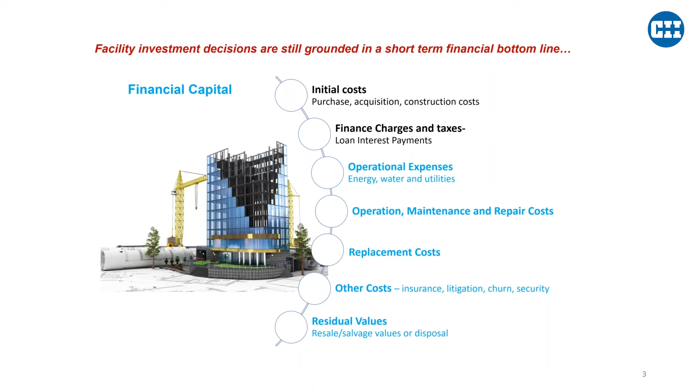In addition to that financial capital, we're also talking about natural capital and human capital as a part of this research study. These are equally important in assessing facility performance for organizational value. So life cycle costing standards have been developed for about 25 years. This NIST life cycle costing manual is from 1995 and definitely sets up a structure for life cycle costing of facilities. We have initial costs, energy costs, operation and maintenance, and so on.

The NIST manual also mentions non-monetary benefits and costs, but the implementation of that has been limited. So one of the goals of our research project was really how do we establish those non-monetary benefits and costs as meaningful components of facility decision-making and analysis. So traditional financial return has been estimated by return on investment, which is just an annual benefit and a first cost relationship, or years of payback, where we take the first cost investment and we divide it by annual benefits.

Another popular assessment tool for financial decision-making of facilities is net present value, or NPV, where we do include a life view. We take future values, future benefits, future costs related to the facility, and discount those back to present value terms. And costs can be investment, maintenance, or replacement costs. And benefits can include things like income, future income, or other benefits that happen over the course of the facility. So we're going to talk about incorporating those as well and use those as some comparison between our approach for the triple bottom line and what we see traditionally in the facilities area.

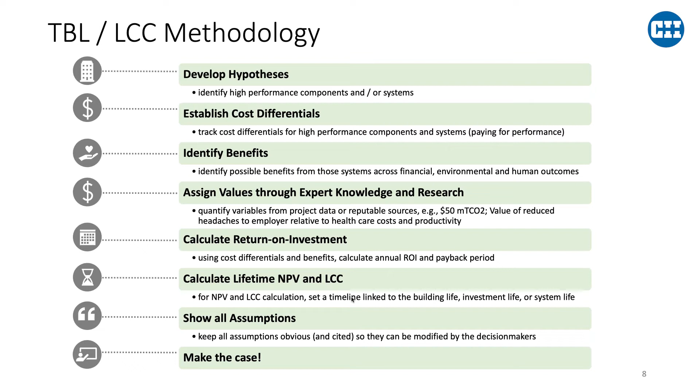One thing you should know is that all of our work is done where the assumptions are completely obvious and cited, so that if any one of you begins to use the calculations, you can change the assumptions to suit what you fundamentally know or believe relative to your facilities or region. And then we make the case through written case studies.

We were very privileged to begin to develop hypotheses with a number of the facilities committee members, University of Florida Shands Hospital System, Deloitte's EDGE project in Amsterdam, the Smithsonian Institution's National Museum of African American History and Culture, NASA's new headquarter project in Florida, and then we began work with the Department of State and with Kaiser to develop hypotheses of investments that were made in those projects that could in fact be cost justified through life cycle and triple bottom

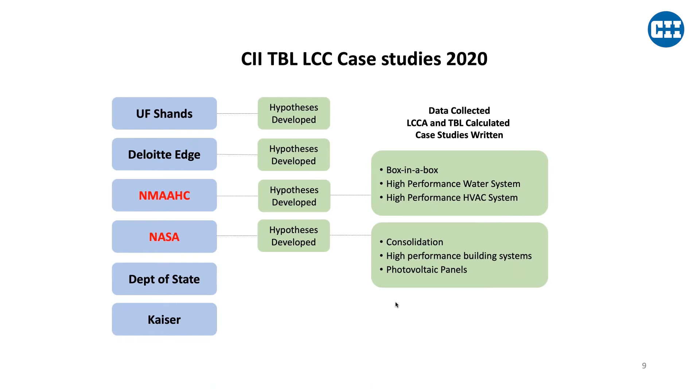line cost. Because of the pandemic, we focused our entire year on 2 of those case studies and developed 3 hypotheses for each of them and built the economic arguments for each of them. And I will take one of those and then pass the baton back to Robert.

Many of you may have had the privilege of visiting this museum before it was closed due to the pandemic in March. The National Museum of African American History and Culture is one of the Smithsonian museums on the Mall in Washington, D.C. What's important to note is that they invested very heavily in not just making a high-profile building, but a high-performance set of systems.

And the arguments were made for why this building needed to have a high-performance box in a box in a box. I'll give more description of that. Why it needed to have a cutting-edge water collection and reuse system, and why it needed a cutting-edge HVAC system with dedicated outside air, heat recovery, and chilled beam technology for the offices.

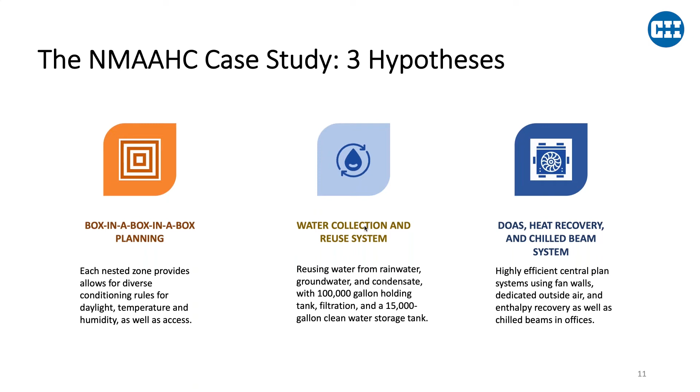So let me talk a little bit about the hypothesis that we made. The investments in NMAAHC, and that's a shorthand since it's a mouthful to say National Museum of African American History and Culture every time. The investments in NMAAHC's museums, 4 layered thermal conditioning zones, which can be called a box within a box within a box, led to significant triple bottom line benefits, advances to the profit, to the financial capital, to the planet or the natural capital, and to the people, the human capital.

The 4 nested zones are an airtight set of dry exhibit cases throughout the museum, so their most tight thermal conditioning is in exhibit cases, set inside of exhibit visitor zones, which are separated from the main circulation areas by automatic glass doors. So it's slightly looser, but still quite tight thermal conditioning zone.

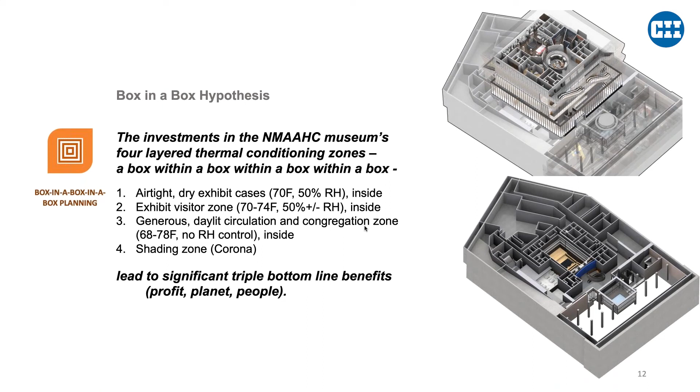And then a very generous daylit circulation and congregation zone with no relative humidity control and a much wider band of thermal conditions. And that was set inside of a shading zone called the corona. So let me work this the other way. The corona is an exhibit itself. It actually has retail value. People are buying artifacts that are reminiscent of the corona to take home after they visit the National Museum of African American History and Culture. It is actually a cultural object.

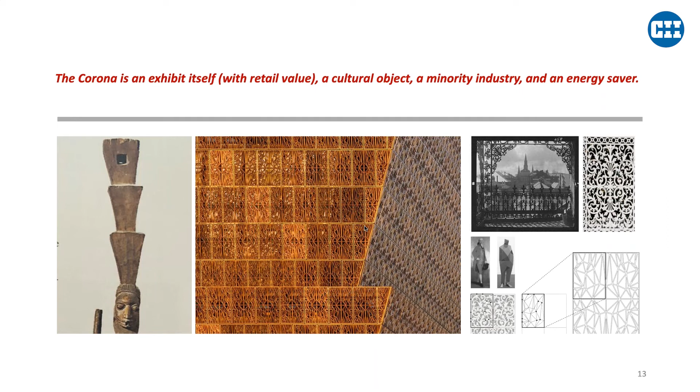The architectural team working on this project were trying to be evocative both of historic African art and cultural icons, and also evocative of an industry that was very African American centric in steel and iron work. It also turns out it's a real energy saver. The variations in the corona densities were optimized by orientation, by south, east, north, and west to manage heat gain and glare with different levels of density on the orientations that had most problematic solar heat gain.

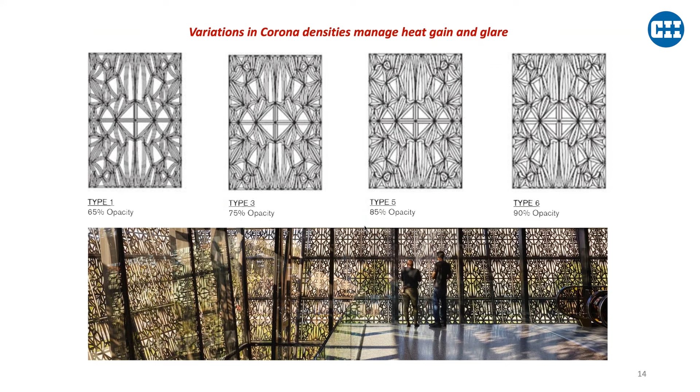The atrium, the next zone, is a public space that has significant cost premiums. In fact, if we just look at what you would need to circulate through the galleries, we estimated that there was almost a 7.72% increase in circulation area over what you would need. And at a cost of about $1,000 a square foot, which is what it costs to build museums of this caliber, it was a $31 million cost premium.

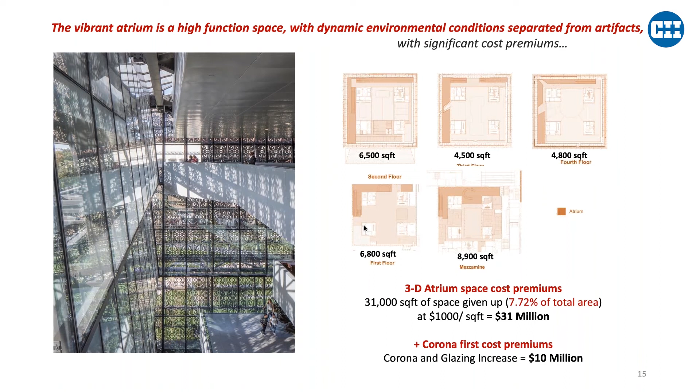In addition to that, the corona, which is a free-floating shading device outside of the high-performance facade, you could have left off that shading device and then upscaled the mechanical system to cope with the solar loads and the heat loss and heat gain loads and dealt with the glare issues. But the decision to invest in that corona was also a $10 million decision. So we actually have a first cost of $41 million, which we'll come back to, which we're going to try to cost justify.

In addition to that, the exhibits themselves were isolated mechanically by automatic doors. So when you enter any one of the exhibit zones, you walk through a glass door, similar to walking in and out of a grocery store, that helps to secure the environmental conditions that surround the artifacts. It also provides security in the event of major public events, and I'll come back to that. And then the glass cases actually have desiccant units built into them, and that provides the tightest humidity and temperature control for the artifact preservation.

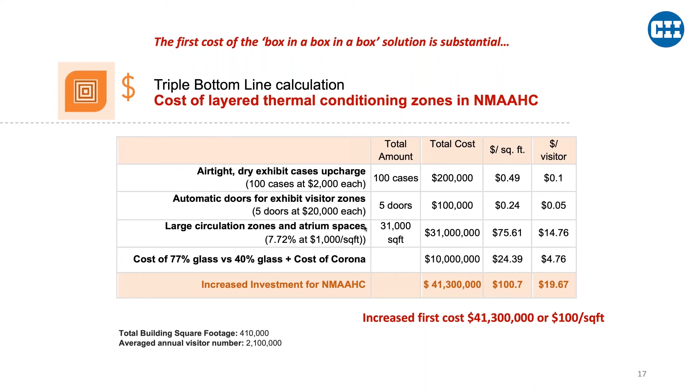Adding up all of those investments, those 4 layers of investments, we have a $41 million increase, or about $100 a square foot increase investment in creating the box in a box in a box. So what are the benefits? Well, the benefits of this box in a box, number one, we're seeing actually visitor numbers. Now, we'll come back to whether that's just because it's the newest museum on the Smithsonian complex, or whether it's because it's a unique collection, or whether it's because of the actual artifact of the building.

Surprisingly, the length of stay in this museum is twice every other museum on the mall. The energy savings are substantial. The artifacts have a much higher level of preservation. It is an event destination, so it is one of the highest and most loved destinations for hosting major public and private events. And it has high retail sales connected to the museum itself.

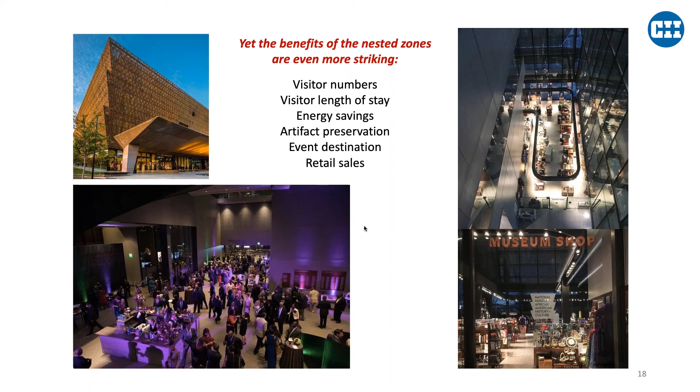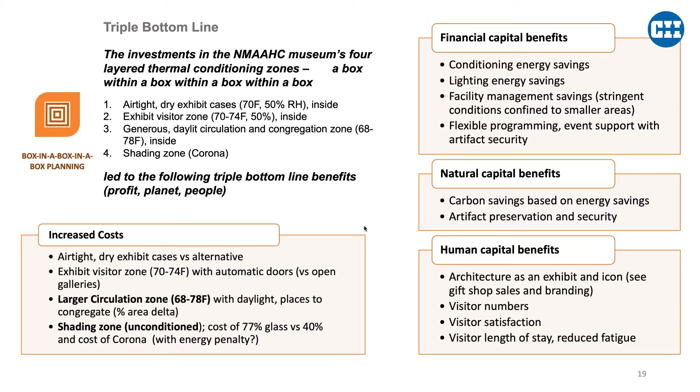So as we had started, the hypothesis is that the investments in this box in a box led to triple bottom line benefits. And we've made a list of the benefits on the right: financial capital benefits of energy and facility management savings, as well as events; the natural capital of carbon benefits associated with the energy savings; and the human capital of visitor numbers and visitor length of stay.

So the financial capital benefits were 9% less heating energy, 2% less electric energy for cooling and ventilation, 4% less electricity for lighting energy, especially in the circulation zone, which is highly daylit, as well as 100 events a year at about $20,000 an event. So $2 million a year of revenue that is made possible by this nested set of zones. When you take that $41 million cost and you look at the benefits that accrue, we have a little under a 20-year payback period and an ROI of 5.1%.

If we add the second bottom line, for every kilowatt hour that this building saved, there is a commensurate carbon benefit, which in the US is roughly about 1 cent or 1.2 cents per kilowatt hour of carbon benefit. At about $50 per metric ton of carbon, it is absolutely valuable for us as a nation and for corporate sustainability reporting to show the carbon benefit of our energy savings.

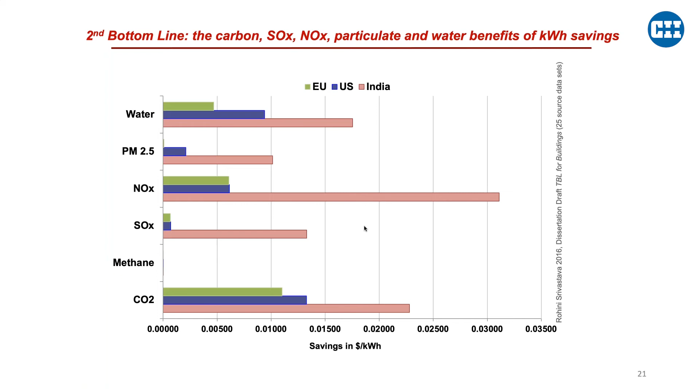For every kilowatt hour that we saved in this building, there are pollution benefits of reducing SOx and NOx and particulates. And then for every kilowatt hour savings, there's also almost a penny of water savings. And so when we start to add those benefits, we're seeing something in the order of about $25,000 or $28,000 per year of benefit. It didn't take our ROI very far, but it did reduce the payback period by several months.

And we're already at this point looking at a 30-year net present value benefit of about 10 or $11 million, so that this project, this investment in a box, over 30 years is going to net $11 million for the federal sector. The third bottom line is always the toughest. How do we show that human benefit has value in the financial packaging?

As I mentioned before, the most unique thing about this museum is that people who come here stay 4 to 6 hours, whereas for every other museum on the mall, the average is 2 to 3 hours of length of stay. And of course, one could argue the whole purpose of a museum, this is mission critical, is to get people to come and spend time. In addition to that, when people spend longer periods of time in a museum, they actually have, on national average, a higher level of purchasing. So instead of $7 per person of purchase, we're looking at $12 of purchasing.

We spent quite a bit of time in interviews with a whole host of design, operations and facilities teams to try to understand why this museum has twice the length of stay of every other museum on the mall. And the answer was, well, it's partially because it's the newest building on the mall, and it's hard to get into. So everyone makes a pilgrimage to go see the newest building, and because it was hard to get into, you really spend the time.

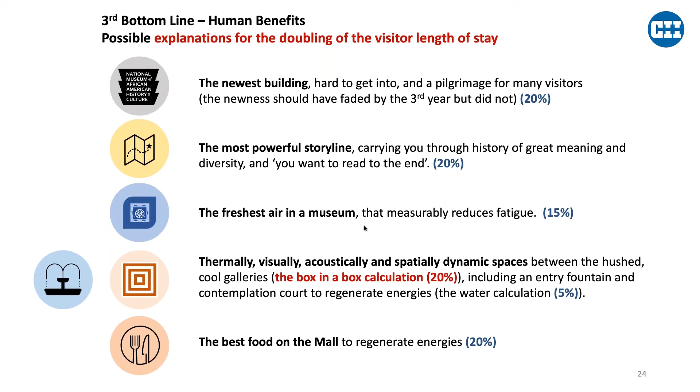We've also been told it's the best food on the mall, so people stay there for lunch and then they're rejuvenated and they stay longer after lunch, and so we've given 20% to that. So we had to make some assumptions here, and we've made these very overt so you can change those assumptions. The result of that 20% impact is almost a $1.8 million per year benefit to the mission of this museum.

In addition to that, there was architecture-related retail sales at about $1.4 million a year. So we have $3.2 million of human benefit in this third bottom line. And all of a sudden, we've gone from almost a 20-year payback to a 7.7-year payback.

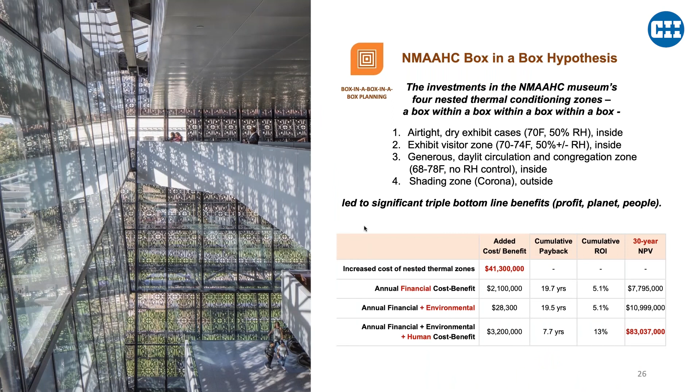And the net present value over 30 years is $83 million. So the total story here is that $41 million of investment in a box resulted in a net present value of $83 million, paying back the $40 million and then accruing $83 million by a 30-year time frame. This is a wonderfully compelling story, only achieved through triple bottom line calculations.

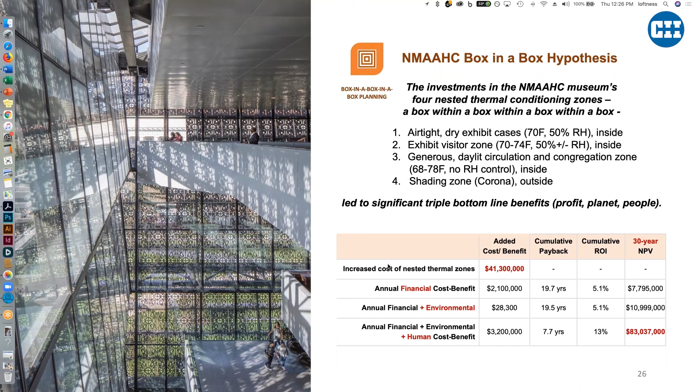I'm going to much more quickly go through the other two hypotheses so I can pass this back. The water system in NMAAHC is also very sophisticated. The six things that you don't usually see in other museums and certainly in many buildings: you don't see the extensive green roofs, not just on top of the buildings, but on top of all of the lower galleries.

You do not see the extensive rainwater capture, the condensate capture from the HVAC system, the groundwater capture from the lawns, and storage and processing with a very large cistern to take all of that water, as well as a processing clean water tank where the gray water is feeding the toilet flushing, the irrigation, and the water features.

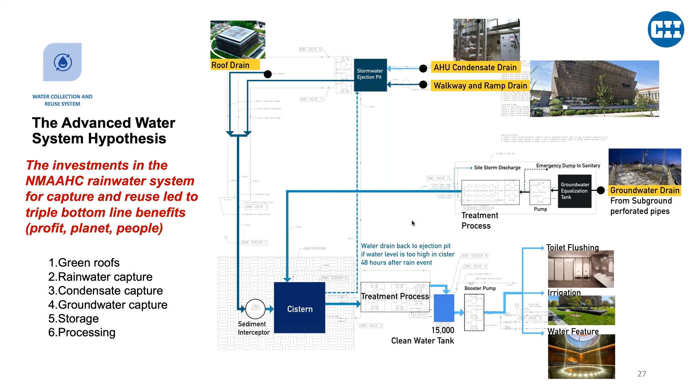This investment is at about $5.4 million, adding up all those six factors, or $13 a square foot. It is a non-trivial investment, but even the first bottom line benefits of water savings were non-trivial. They were able to eliminate 1.2 million gallons of potable water demand each year by capturing water on site and reusing it for all the end uses that I talked about, for landscaping, for toilets, and for water features.

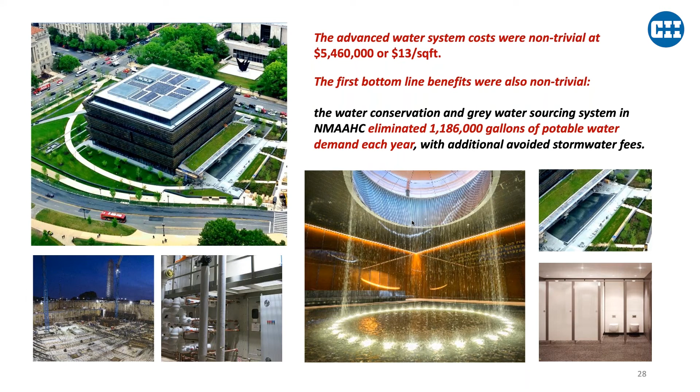So the financial capital savings alone give us about a 5% ROI and a 20-year payback, just at the financial level. When we add the natural capital, through discovery, through interviewing the city of DC and a whole host of individuals, we found out that the mall in Washington floods once every 5 to 10 years with serious flooding, as you can see by the picture in the middle here.

And there is a proposal to build a $360 million pumping station in this district of the Federal Triangle and the National Mall in order to stop this flooding, which is catastrophic for a lot of buildings and for what they house. If every building on the mall and in the Federal Triangle in this region did the level of investment that NMAAHC had put in, this $5 million additional investment, they would not need this $360 million pumping station. The level of contribution of NMAAHC to reducing this is measurable.

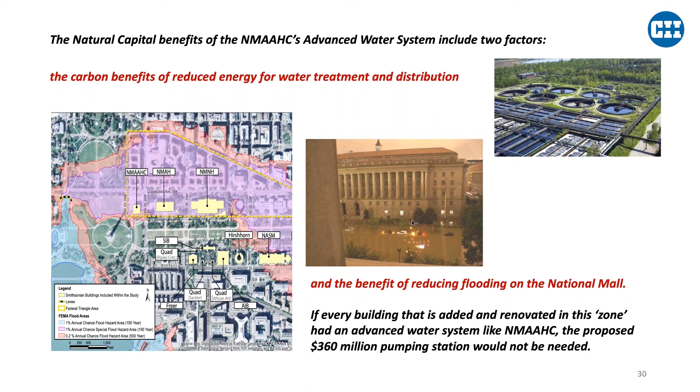And it would take, of course, a whole suite of 30 or so buildings to be able to displace the need. But we can take those $360 million and divide by all the buildings and figure out what the value is. So we put a value of avoided damage to the Capitol Mall at about $120,000 per year. And what you'll notice here is we've gone from a 20-year payback to a 13-year payback because of the natural capital. This is not in the pockets of the Smithsonian's operating budget, but it is in the pockets of Washington, D.C. and the natural capital that we share.

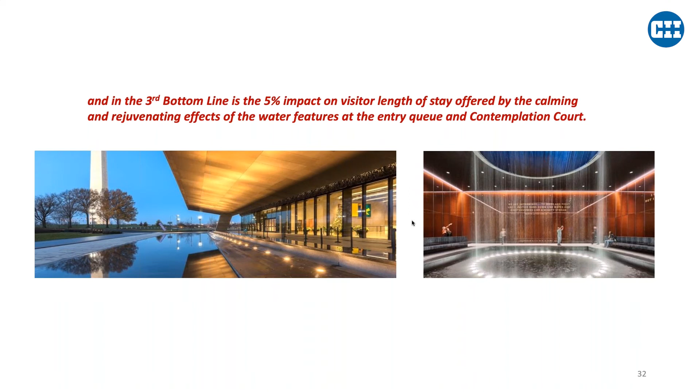The third bottom line is, again, the toughest. What is the value to the occupants and humans of this building? These two water features: the water feature at the entry with a series of fountains that add evaporative cooling for the people who are waiting to enter the museum, and the contemplation court, which is in the middle of the museum, an incredibly restful sort of 10-minute break between the lower galleries and the upper galleries, heavily used by all the people who come here. We've put a value on that because we think it's contributed to length of stay.

And the consequence of all three of those is that we're now looking at a 6.4-year cumulative payback. So we've added these paybacks. It's gotten lower and lower. The ROI went from 5% to 7% to 16% by the third bottom line. And the net present value is now at almost $10 million.

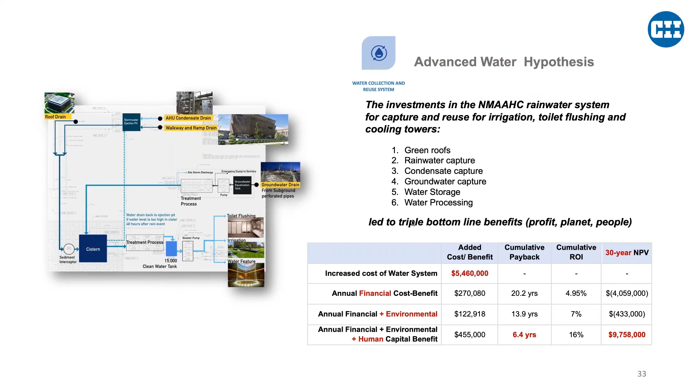And the last hypothesis, I will just give you the bottom line. We don't have time. There's a whole report behind this. They invested in fan wall technology, air side economizer, enthalpy recovery, electronic filtration, water side economizer, dedicated outside air for the office systems, and chilled beam for the office spaces, roughly a $5.4 million investment.

And when we did our first bottom line, we saw an 18-year payback on energy. On the second bottom line, it became a 14-year payback when we added the carbon footprint of those savings, and then by the third bottom line, a 2-year payback, so that it became a net present value of $40 million. We think triple bottom line accounting is very effective at telling this story.

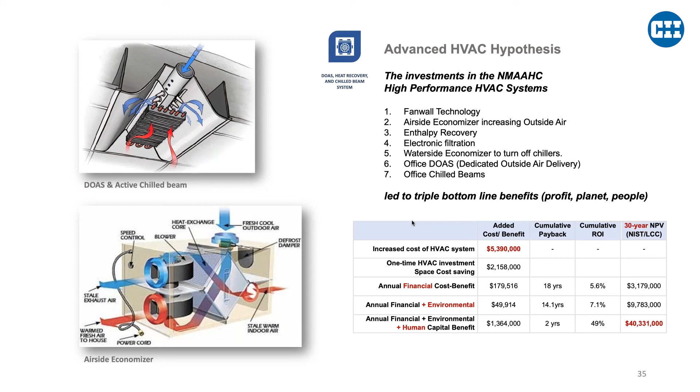Oops, well, change presenter. Oh gosh, it lists everybody here. You guys are all presenters. Robert, where are you? I'm here. Yeah, really. Oh, here, I got it. Woo. Okay. Okay, thanks, Vivian. And so we're just getting the screen loaded up here, and we'll be ready to go.

And thanks, Vivian. That's a great review of a really exciting project. And we have a second case study that's also a very exciting project. This is a headquarters building for NASA. It's called the Central Campus Headquarters Building, and it's at the Kennedy Space Center in Florida.

This project is unique. It presents some unique opportunities to look at triple bottom line accounting and triple bottom line decision making. The first of the three hypotheses we covered for this case study is one that I think a lot of organizations have similar questions on. And that question is, should I remove my aging facilities and consolidate some of those into a high performance facility? What are the benefits that we might get from going down that path? When should we start to look at either updating or replacing existing facilities?

And then the second is high performance building components. So this is focused just on the headquarters building itself. And then as part of this project, NASA installed a photovoltaic panel array that's generating carbon-free energy for the facility. So we'll take a look at how that fits into the triple bottom line.

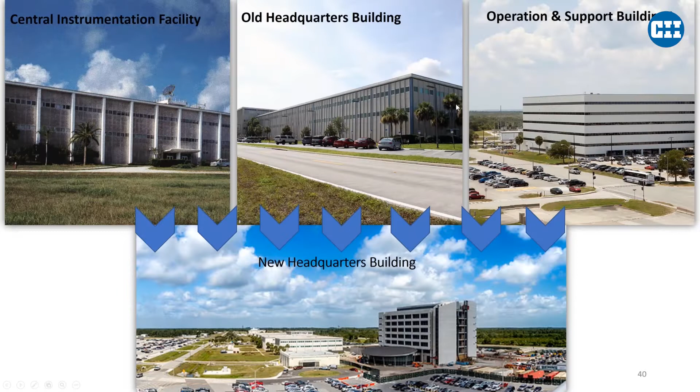So a decision has to be made on whether or not to incorporate those and create a new headquarters building. And the decision that was made was to do a phase 1, which is what you see in this bottom part of the slide, and in the future, a phase 2 of new headquarters buildings that consolidate facilities. So what are the issues here? There's increasing first cost, right? If I continue with my existing facilities, I just have to operate, maintain, replace, and not have a large first cost outlay in order to design and construct a new facility and demolish the existing facilities.

We have moving costs, activation costs, and startup costs that we have to consider, right? So all of those sum up to a significant first cost investment of about $87 million in the new facility. The question is, will it pay off, right? And where are the opportunities? So for the financial capital, we're looking at energy use, operation and maintenance. How do we spend our budgets on operation and maintenance versus capital improvements, right?

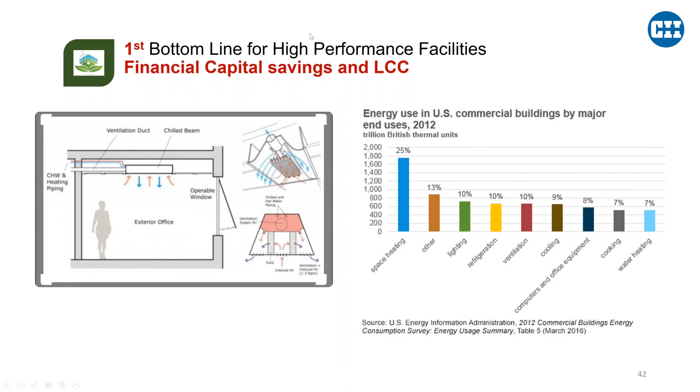Versus new facilities and capital improvements. So that's really the trade-off that we're going to illustrate in this case study. So we have the status quo, which is the continued operations of existing facilities, continue to maintain those, continue to run what really are aging and really subpar in very many aspects.

So if we look at the trade-offs, we can estimate, for example, what the energy consumption will be in the new facility. Look at what it is in the existing facilities that we're going to potentially remove, and then look at the annual operation and maintenance and calculate, right, that present value over its life cycle.

So for the next 30 years, if we continue to use those existing facilities, we're going to increase the life cycle cost of the status quo over that time, compared to investing in a new facility, in a new headquarters facility. So that first bottom line results in savings in electricity, kilowatt hours, and therms of natural gas.

We can annualize those over the 30-year life cycle, comes out to about $4 million per year, and a cost per square foot. And we're looking at a financial return on investment of about 4.5% and a payback period of 23 years.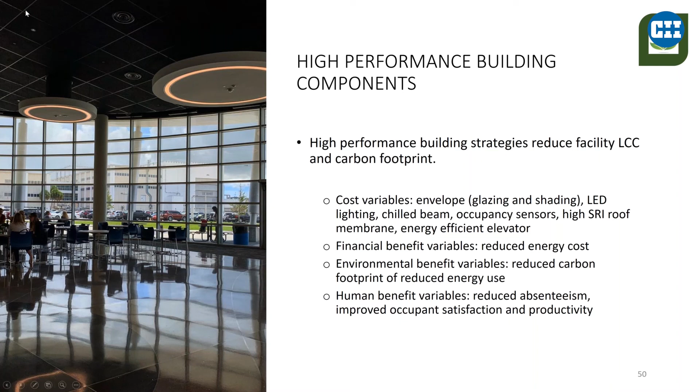What impact does it have on energy costs? What impact does it have on carbon footprint? What impact does it have on the occupants, and how do we understand that? So our baseline comparison building that we identified on campus is a similar building, 5-story, 190,000 square foot, about 900 office spaces, as well as a conference center.

So we're looking at the increased cost of the high performance components of the headquarters building. And some of those are in the enclosure, right? There's some glazing and shading components that are in the new headquarters building. We're looking at a high efficiency lighting system, as well as a high efficiency HVAC system that consists of chilled beams that provide a much higher level of occupant comfort. So we're looking at that investment in the headquarters building relative to the benefits.

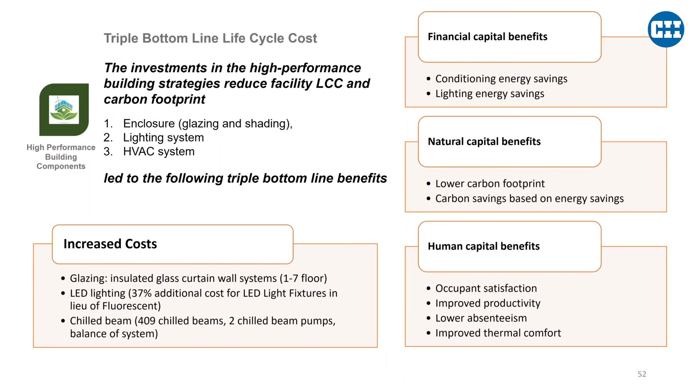So we see financial capital benefits. So we have energy savings, lighting energy savings, as well as conditioning energy savings. As I said, we have lower carbon footprint, and then we have improved human capital benefits in terms of the occupants and satisfaction, productivity, lower absenteeism related to the improved thermal comfort of these high performance systems. So I'm just going to jump to the bottom line summary here so that we can conclude our presentation and get to some questions and discussion.

When we look at the cumulative benefits, we really see the 30-year net present value analysis showing a positive net present value when all of these three triple bottom line aspects are considered. We have a 7-year payback for that cumulative bottom line, and a 15% return on investment for these investments in these high performance components. Last thing, I'll just touch on this briefly.

Part of the project was installing a photovoltaic array that produces electricity that offsets the electricity consumption of the headquarters building. Obviously, this has impacts on the cost of operating the facility in electricity, and also reduces the carbon footprint. So we're looking at two of the bottom lines here, the environmental and the financial. There are some human benefits, some occupant benefits that we could consider, and that's potentially the additional benefits in air quality due to the no emission photovoltaic panels.

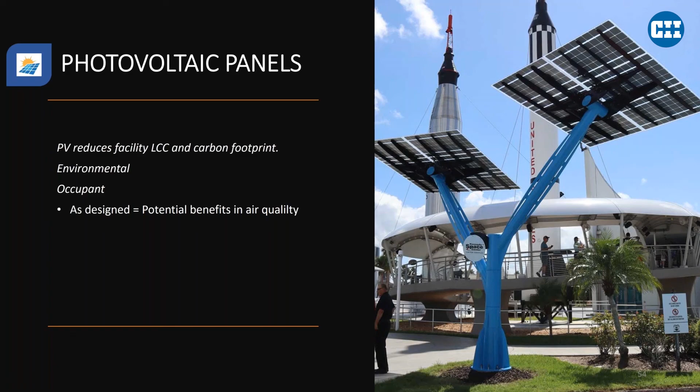So when we looked at this, we're looking at the initial cost of the system, right? That's a first cost increase from just purchasing electricity from the utility. And we're looking at the financial benefit over time, right? We have electricity energy costs from a utility over time, or we have an investment in a photovoltaic system that requires some operation and maintenance costs, some replacement and repair costs, but overall, may show benefit compared to utility. And then finally, the environmental benefit with the reduced carbon footprint.

So the financial benefit does show a positive net present value of about $4.6 million over the 30-year study period, and a payback of about 26 years, ROI of about 4%. If we add in the environmental, we improve that a little bit more to $5.8 million of net present value over the 30-year life, shortening the payback to 23 years and improving the ROI to 4.3%. As I said, we haven't addressed the human dimension here, but that's something that we could also look at in the future.